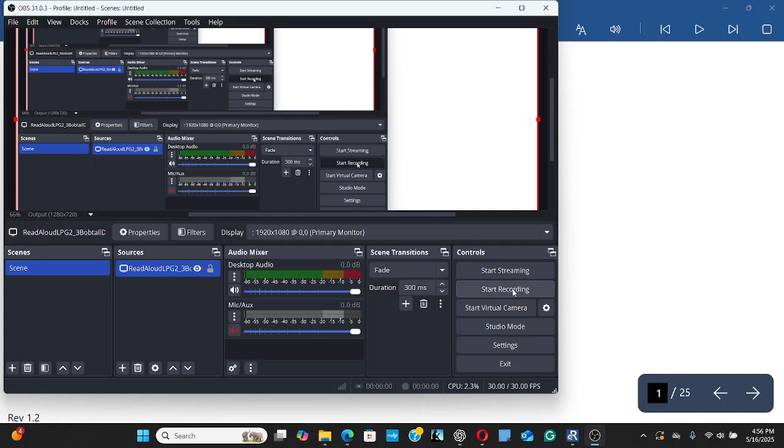Texas LP Gas Examination Study Guide, Bobtail Driver, Employee Level. Railroad Commission of Texas, Rev 1.2. Railroad Commission of Texas, Texas LP Gas Examination Study Guide, 1.

Notice: this publication is intended for use in its entirety as a guide for persons preparing to take a Railroad Commission LP gas qualifying examination. Any other use or distribution of this publication or use or distribution of any portion of this publication for any purpose whatsoever is considered by the Railroad Commission of Texas to be misuse of this publication.

This publication is not intended to be an exhaustive treatment of the subjects covered and should not be interpreted as precluding the use of other safety programs or procedures that comply with 1. applicable federal, state, and/or local code provisions, statutes, ordinances, and/or other regulations, including, but not limited to, the Railroad Commission of Texas LP gas safety rules and codes adopted by the Railroad Commission of Texas, and/or 2. other industry standards and/or practices.

Every effort was made to ensure that this publication was accurate and up to date as of the date of publication. The reader is cautioned, however, about reliance on this publication or any portion thereof at any time thereafter, particularly because changes in technology are likely to occur that might make portions of this publication inaccurate and out of date.

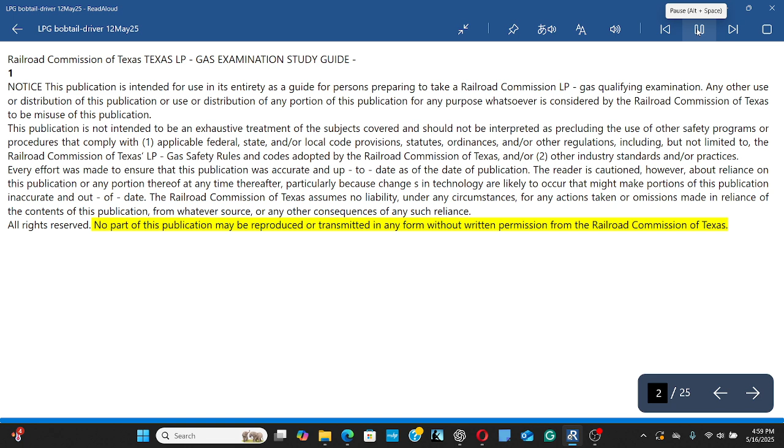Railroad Commission of Texas, Texas LP Gas Examination Study Guide, 2. LP Gas Examination Study Guide, Employee Level, Bobtail Driver. Who should use this guide? You should use this guide if you plan to take the Railroad Commission's employee level qualifying examination to operate a propane bobtail. The guide may not be used during the examination.

The bobtail certification qualifies you to perform the following LP gas activities: operate a bobtail, operate a transport unit, perform leak checks and pressure tests, light appliances, adjust regulators and thermocouples, inspect, requalify, fill, disconnect, and connect DOT cylinders, including forklift cylinders, replace cylinder valves, and fill ASME motor fuel tanks or mobile fuel containers.

The bobtail certification does not qualify you to connect or disconnect containers, except when performing a pressure test or removing a container from service. To requalify cylinders, your employer must have a requalifier's identification number, RIN, issued by the U.S. Department of Transportation's Pipeline and Hazardous Materials Safety Administration.

What books do I need? This examination tests your knowledge of the laws and standards that apply to bobtail operations in Texas. These laws and standards are found in 4 books: LP Gas Safety Rules, Texas Railroad Commission; NFPA 58 Liquefied Petroleum Gas Code, National Fire Protection Association, 2017; NFPA 54 National Fuel Gas Code, National Fire Protection Association, 2018; Title 49, Code of Federal Regulations, CFR, Supplement.

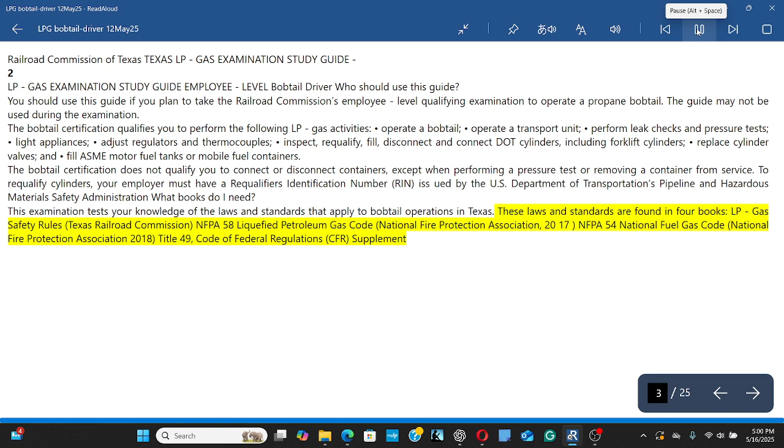Railroad Commission of Texas, Texas LP Gas Examination Study Guide, 3. Where do I get these books? You may download the current edition of the Railroad Commission's LP Gas Safety Rules in PDF format free online at www.rrc.texas.gov. If you need printed copies, they may be purchased for $10, tax included, by calling the Railroad Commission's Publications Office at 512-463-7309.

You may also order NFPA manuals online at www.nfpa.org, click on Codes and Standards. The full current text of 49 CFR can also be viewed online. Go to http://ecfr.gov and select Title 49 Transportation.

Sections and topics. Before you take this examination, you should know the definitions found in this study guide and the contents of the sections of the codes and standards listed below. The actual examination questions may not cover all of the listed sections and topics.

Terms and definitions. Note, the list below is not exhaustive. You are responsible for knowing all the terms and definitions that apply to the LP gas activities you will perform, as well as the rules and standards highlighted in this guide. Note, informal terms that are sometimes used in the propane industry instead of formal technical terms are given in brackets.

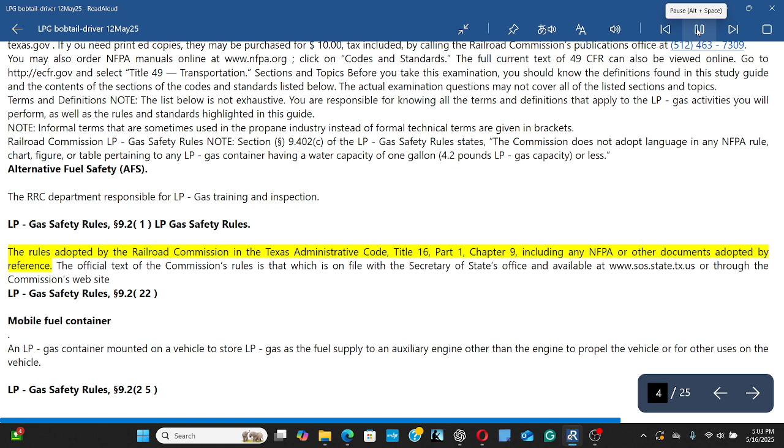The RRC Department is responsible for LP gas training and inspection. LP Gas Safety Rules, 9.2: LP Gas Safety Rules are the rules adopted by the Railroad Commission in the Texas Administrative Code, Title 16, Part 1, Chapter 9, including any NFPA or other documents adopted by reference. The official text of the Commission's rules is that which is on file with the Secretary of State's office and available at www.sos.state.tx.us or through the Commission's website.

LP Gas Safety Rules, 9.2.22. Mobile Fuel Container: An LP gas container mounted on a vehicle to store LP gas as the fuel supply to an auxiliary engine other than the engine to propel the vehicle, or for other uses on the vehicle.

LP Gas Safety Rules, 9.2.25. Railroad Commission of Texas, Texas LP Gas Examination Study Guide, item 4: Motor Fuel Container. An LP gas container mounted on a vehicle to store LP gas as the fuel supply to an engine used to propel the vehicle.

LP Gas Safety Rules, 9.2.27. Rules Examination: The Commission's written examination that measures an examinee's working knowledge of Chapter 113 of the Texas Natural Resources Code and/or the current LP Gas Safety Rules. LP Gas Safety Rules, 9.2.41.

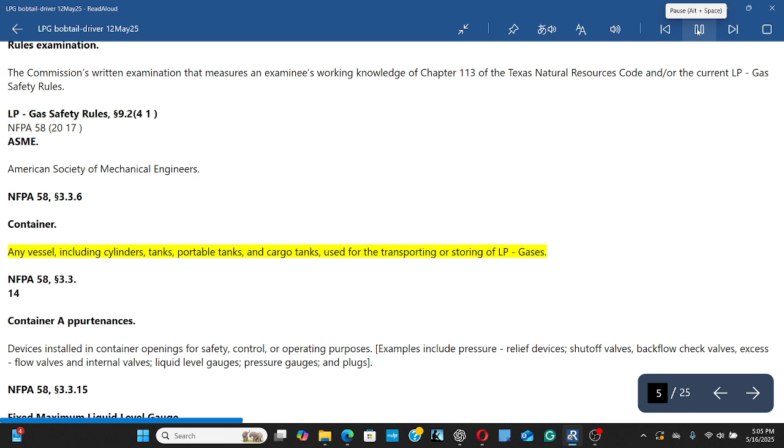NFPA 58, 2017. ASME: American Society of Mechanical Engineers. NFPA 58, 3.3.6. Container: Any vessel, including cylinders, tanks, portable tanks, and cargo tanks, used for the transporting or storing of LP gases. NFPA 58, 3.3.14.

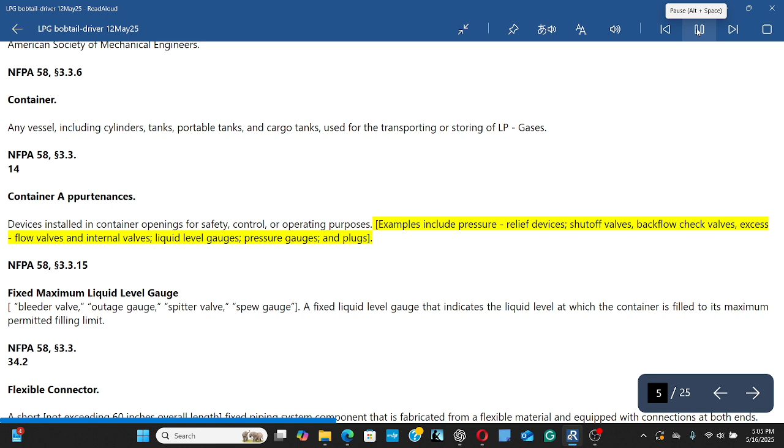Container appurtenances: Devices installed in container openings for safety, control, or operating purposes. Examples include pressure relief devices, shut-off valves, backflow check valves, excess flow valves and internal valves, liquid level gauges, pressure gauges, and plugs. NFPA 58.

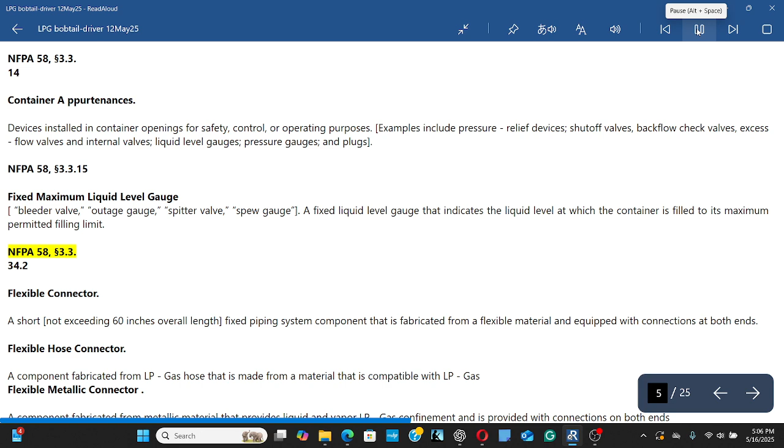3.3.15. Fixed maximum liquid level gauge, also called bleeder valve, outage gauge, spitter valve, or spew gauge: A fixed liquid level gauge that indicates the liquid level at which the container is filled to its maximum permitted filling limit. NFPA 58, 3.3.

34.2. Flexible connector: A short, not exceeding 60 inches overall length, fixed piping system component that is fabricated from a flexible material and equipped with connections at both ends.

Flexible hose connector: A component fabricated from LP gas hose that is made from a material compatible with LP gas. Flexible metallic connector: A component fabricated from metallic material that provides liquid and vapor LP gas confinement and is provided with connections on both ends. Maximum allowable working pressure (MAWP): The maximum pressure at which a pressure vessel is to operate, as described by the ASME Boiler and Pressure Vessel Code. NFPA 58, 3.3.47.

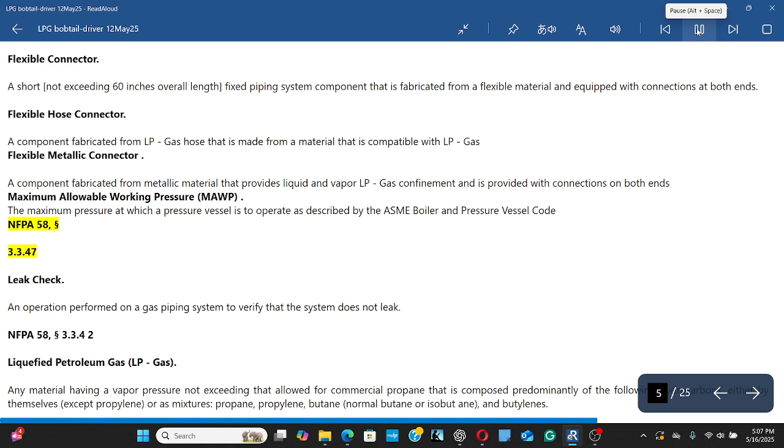Leak check: An operation performed on a gas piping system to verify that the system does not leak. NFPA 58.

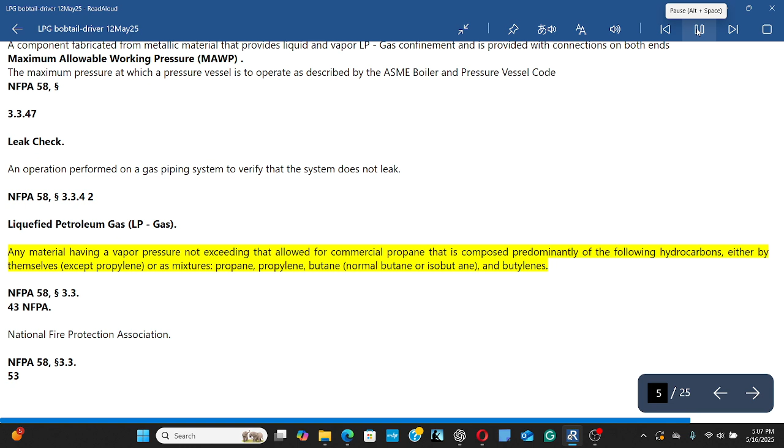3.3.42. Liquefied petroleum gas (LP gas): Any material having a vapor pressure not exceeding that allowed for commercial propane, composed predominantly of the following hydrocarbons, either by themselves except propylene, or as mixtures: propane, propylene, butane, normal butane or isobutane, and butylenes. NFPA 58, 3.3.43.

NFPA: National Fire Protection Association. NFPA 58, 3.3.53. Railroad Commission of Texas, Texas LP Gas Examination Study Guide, item 5: Overfilling Prevention Device (OPD, Stop Valve): A device designed to provide an automatic means to prevent the filling of a container beyond a predetermined level. NFPA 58, 3.3.55.

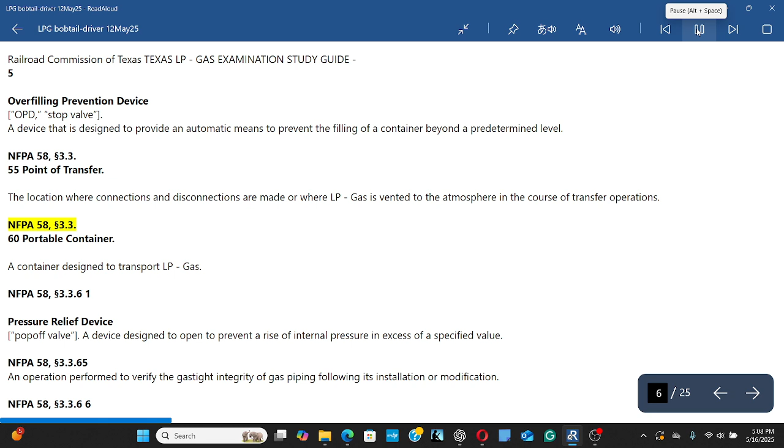Point of transfer: The location where connections and disconnections are made, or where LP gas is vented to the atmosphere in the course of transfer operations. NFPA 58, 3.3.60. Portable container: A container designed to transport LP gas. NFPA 58.

3.3.61. Pressure relief device (pop-off valve): A device designed to open to prevent a rise of internal pressure in excess of a specified value. NFPA 58.

3.3.65. An operation performed to verify the gas-tight integrity of gas piping following its installation or modification. NFPA 58.

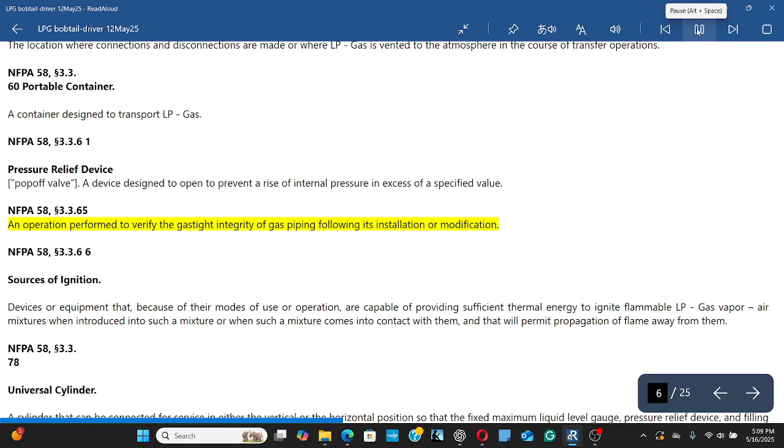3.3.66. Sources of ignition: Devices or equipment that, because of their modes of use or operation, are capable of providing sufficient thermal energy to ignite flammable LP gas vapor-air mixtures when introduced into such a mixture or when such a mixture comes into contact with them, and that will permit propagation of flame away from them.

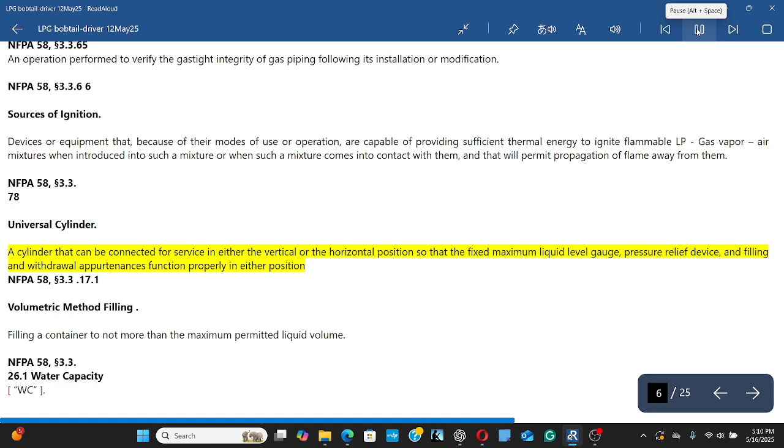NFPA 58, 3.3.78. Universal cylinder: A cylinder that can be connected for service in either the vertical or the horizontal position, so that the fixed maximum liquid level gauge, pressure relief device, and filling and withdrawal appurtenances function properly in either position. NFPA 58.

3.17.1. Volumetric method filling: Filling a container to not more than the maximum permitted liquid volume. NFPA 58, 3.3.

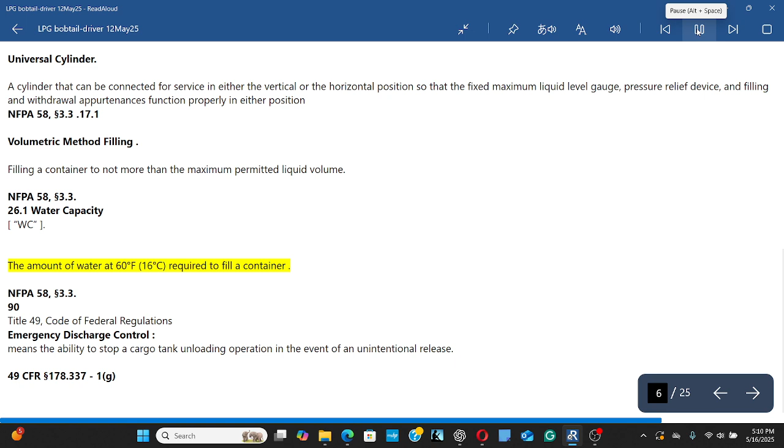Water capacity, WC. The amount of water at 60 degrees Fahrenheit, 16 degrees Celsius, required to fill a container. NFPA 58, 3.3.90. Title 49, Code of Federal Regulations.

Emergency discharge control means the ability to stop a cargo tank unloading operation in the event of an unintentional release. 49 CFR 178.337, 1, G.

Railroad Commission of Texas, Texas LP Gas Examination Study Guide. 6. Key topics. Note, the list below is not exhaustive. You are responsible for knowing all the facts, rules, standards, and procedures that apply to the LP gas activities you will perform, as well as the rules and standards highlighted in this guide. As you study the applicable codes and standards, pay special attention to the facts, rules, and procedures related to the following key topics. When you take the examination, read each question very carefully.

Administrative rules, general requirements. Company license. No person may engage in any LP gas activity until that person has obtained a license from the Commission authorizing the LP gas activities. LP Gas Safety Rules, 9.7, A.

Licensees, registered manufacturers, company representatives, and operations supervisors at each outlet shall have copies of all current licenses and/or manufacturer registrations and certificates for employees at that location available for inspection during regular business hours. LP Gas Safety Rules, 9.7, C.

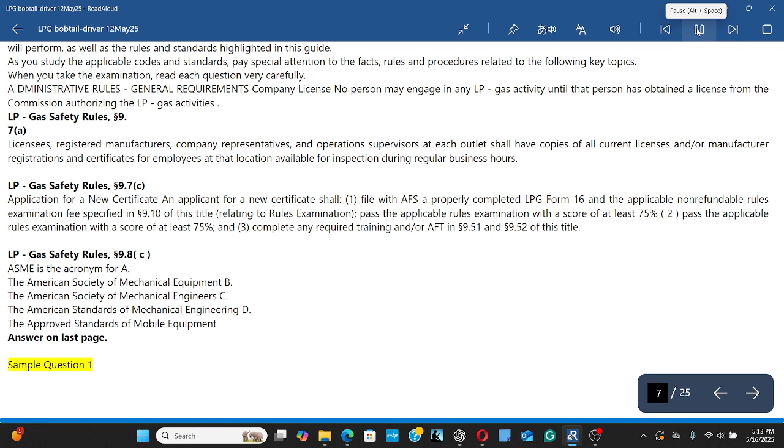Railroad Commission of Texas, Texas LP Gas Examination Study Guide. 7. Certificate Renewal. Certificate holders shall remit the non-refundable $35 annual certificate renewal fee to AFS on or before May 31st of each year. Individuals who hold more than one certificate shall pay only one annual renewal fee.

1. Failure to pay the non-refundable annual renewal fee by the deadline shall result in a lapsed certificate. A. To renew a lapsed certification, the individual must pay the non-refundable $35 annual renewal fee plus a non-refundable $20 late filing fee. B. If an individual's certificate lapses or expires, that individual shall immediately cease performance of any LP gas activities authorized by the certificate.

C. If an individual's certificate has been expired for more than 2 years from May 31st of the year in which the certificate lapsed, that individual shall comply with the requirements in 9.8 of this title, relating to requirements and application for a new certificate, or 9.13 of this title. LP Gas Safety Rules, 9.9, C.

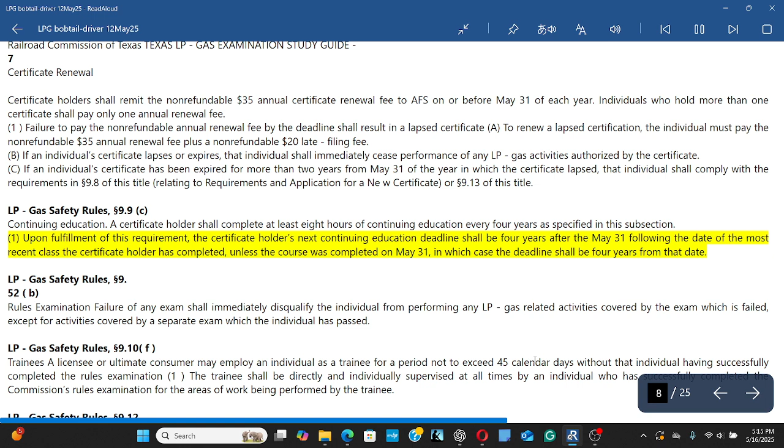Continuing Education. A certificate holder shall complete at least 8 hours of continuing education every 4 years as specified in this subsection. 1. Upon fulfillment of this requirement, the certificate holder's next continuing education deadline shall be 4 years after the May 31st following the date of the most recent class the certificate holder has completed, unless the course was completed on May 31st, in which case the deadline shall be 4 years from that date.

LP Gas Safety Rules, 9.52, B. Rules examination. Failure of any exam shall immediately disqualify the individual from performing any LP gas-related activities covered by the exam which is failed, except for activities covered by a separate exam which the individual has passed. LP Gas Safety Rules, 9.10, F.

Trainees. A licensee or ultimate consumer may employ an individual as a trainee for a period not to exceed 45 calendar days without that individual having successfully completed the rules examination. 1. The trainee shall be directly and individually supervised at all times by an individual who has successfully completed the Commission's rules examination for the areas of work being performed by the trainee. LP Gas Safety Rules, 9.12.

Railroad Commission of Texas, Texas LP Gas Examination Study Guide. 8. Qualified personnel. Persons whose duties fall within the scope of this code shall be provided with training that is consistent with the scope of their job activities and that includes proper handling and emergency response procedures. NFPA 58, 4.4.1. Refresher training shall be provided at least every 3 years. NFPA 58, 4.4.3.

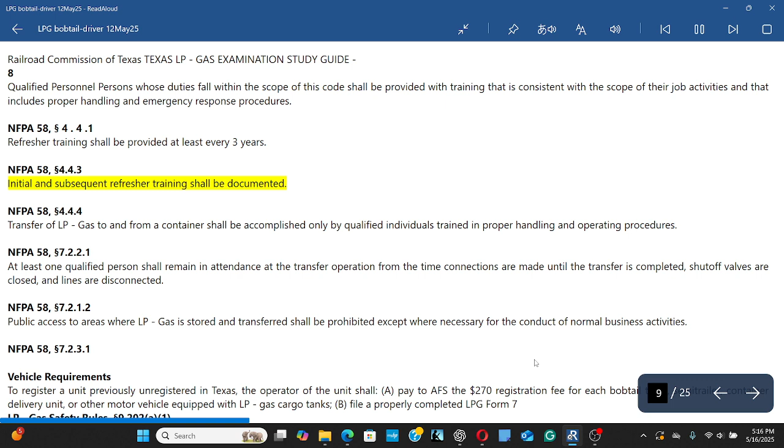Initial and subsequent refresher training shall be documented. NFPA 58, 4.4.4: Transfer of LP gas to and from a container shall be accomplished only by qualified individuals trained in proper handling and operating procedures.

NFPA 58, 7.2.2.1: At least one qualified person shall remain in attendance at the transfer operation from the time connections are made until the transfer is completed, shut-off valves are closed, and lines are disconnected.

NFPA 58, 7.2.1.2: Public access to areas where LP gas is stored and transferred shall be prohibited except where necessary for the conduct of normal business activities.

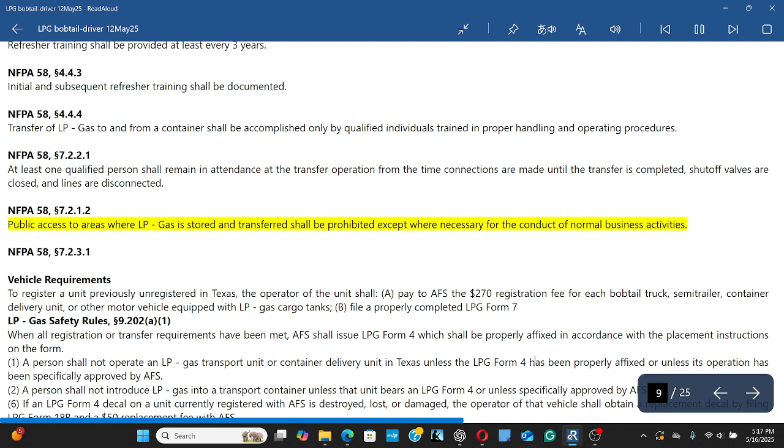NFPA 58, 7.2.3.1: Vehicle requirements. To register a unit previously unregistered in Texas, the operator of the unit shall: A, pay to AFS the $270 registration fee for each bobtail truck, semi-trailer, container delivery unit, or other motor vehicle equipped with LP gas cargo tanks. B, file a properly completed LPG Form 7.

LP Gas Safety Rules, 9.202, A.1: When all registration or transfer requirements have been met, AFS shall issue LPG Form 4 which shall be properly affixed in accordance with the placement instructions on the form.

1. A person shall not operate an LP gas transport unit or container delivery unit in Texas unless the LPG Form 4 has been properly affixed or unless its operation has been specifically approved by AFS. 2. A person shall not introduce LP gas into a transport container unless that unit bears an LPG Form 4 or unless specifically approved by AFS.

6. If an LPG Form 4 decal on a unit currently registered with AFS is destroyed, lost, or damaged, the operator of that vehicle shall obtain a replacement decal by filing LPG Form 18B and a $50 replacement fee with AFS. LP Gas Safety Rules, 9.202, C.

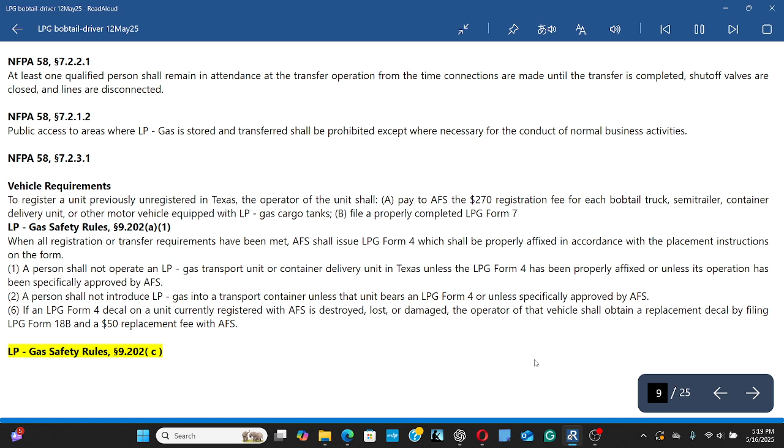Railroad Commission of Texas, Texas LP Gas Examination Study Guide. 9. Regulations for operating a bobtail. Driver Vehicle Inspection: A motor vehicle shall not be operated in such a condition as to likely cause an accident or a breakdown of the vehicle.

49 CFR 396.7, A: Report required. Every motor carrier shall require its drivers to report, and every driver shall prepare a report in writing at the completion of each day's work on each vehicle operated. The report shall cover at least the following parts and accessories.

1. Service brakes including trailer brake connections. 2. Parking brake. 3. Steering mechanism. 4. Lighting devices and reflectors. 5. Tires. 6. Horn. 7. Windshield wipers. 8. Rear vision mirrors. 9. Coupling devices. 10. Wheels and rims. 11. Emergency equipment.

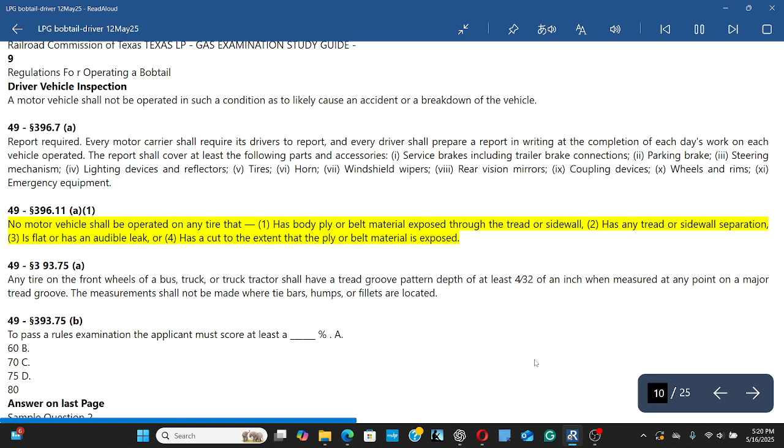49 CFR 396.11, A.1: No motor vehicle shall be operated on any tire that: 1, has body ply or belt material exposed through the tread or sidewall; 2, has any tread or sidewall separation; 3, is flat or has an audible leak; or 4, has a cut to the extent that the ply or belt material is exposed.

49 CFR 393.75, A: Any tire on the front wheels of a bus, truck, or truck tractor shall have a tread groove pattern depth of at least 4/32 of an inch when measured at any point on a major tread groove. The measurements shall not be made where tie bars, humps, or fillets are located.

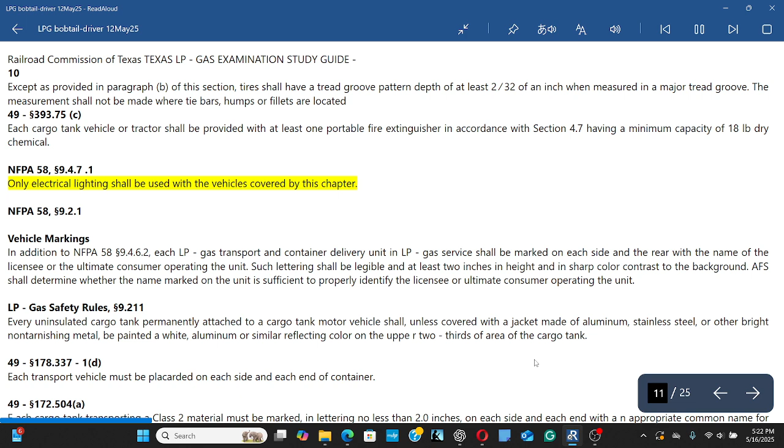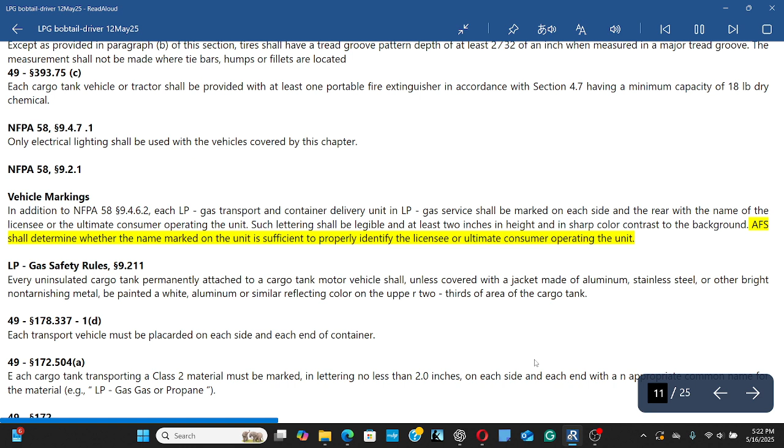NFPA 58, 9.2.1: Vehicle markings. In addition to NFPA 58 9.4.6.2, each LP gas transport and container delivery unit in LP gas service shall be marked on each side and the rear with the name of the licensee or the ultimate consumer operating the unit. Such lettering shall be legible and at least 2 inches in height and in sharp color contrast to the background. AFS shall determine whether the name marked on the unit is sufficient to properly identify the licensee or ultimate consumer operating the unit. LP Gas Safety Rules, 9.211.

Every uninsulated cargo tank permanently attached to a cargo tank motor vehicle shall, unless covered with a jacket made of aluminum, stainless steel, or other bright non-tarnishing metal, be painted white, aluminum, or a similar reflecting color on the upper 2/3 of the area of the cargo tank.

49 CFR 178.337, 1, d: Each transport vehicle must be placarded on each side and each end of container.

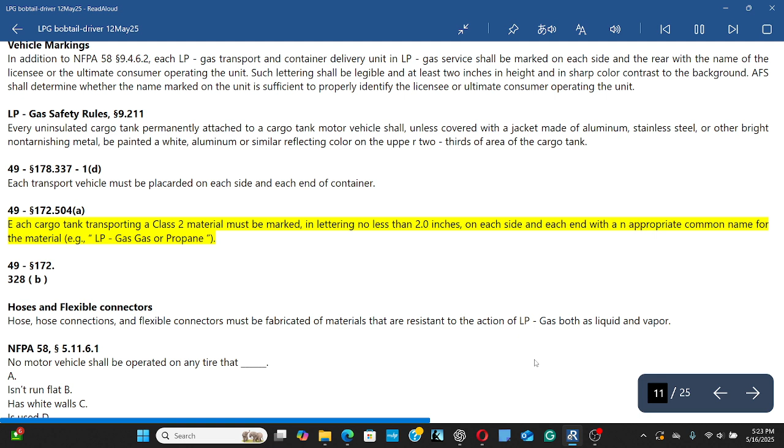Each cargo tank transporting a Class 2 material must be marked, in lettering no less than 2.0 inches, on each side and each end with an appropriate common name for the material, for example LP gas or propane. 49 CFR 172.328.

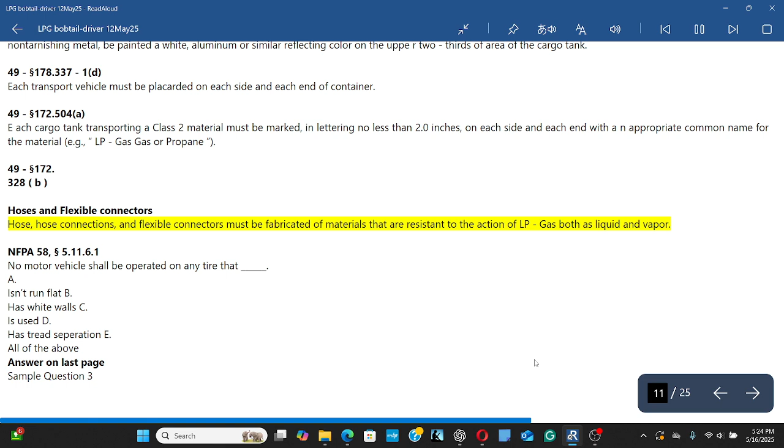B. Hoses and flexible connectors. Hose connections and flexible connectors must be fabricated of materials that are resistant to the action of LP gas, both as liquid and vapor. NFPA 58, 5.11.6.1.

No motor vehicle shall be operated on any tire that: a. Isn't run flat, b. Has white walls, c. Is used, d. Has tread separation, e. All of the above. Answer on last page. Sample question 3.

Railroad Commission of Texas LP Gas Examination Study Guide. 11. Flexible connectors used in the piping system to compensate for stresses and vibration shall be limited to 3 feet in overall length and, when replaced, shall comply with 5.11.6. NFPA 58.

NFPA 58, 9.4.3.6. Flexible hose connectors shall be permanently marked to indicate the date of installation of the flexible hose connector. NFPA 58, 9.4.3.7.1. The flexible hose portion of the connector shall be replaced within 10 years of the installation of the connector and visually inspected before the first delivery of each day. NFPA 58, 9.4.3.7.2. By July 1, 2000, the operator must assure that each delivery hose assembly is permanently marked with a unique identification number and maximum working pressure.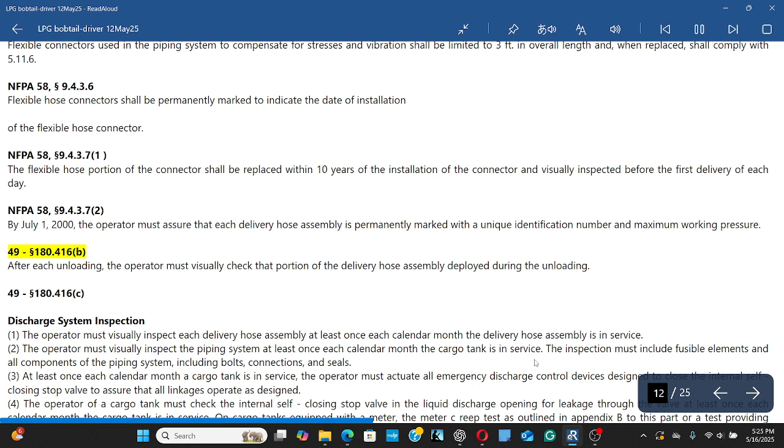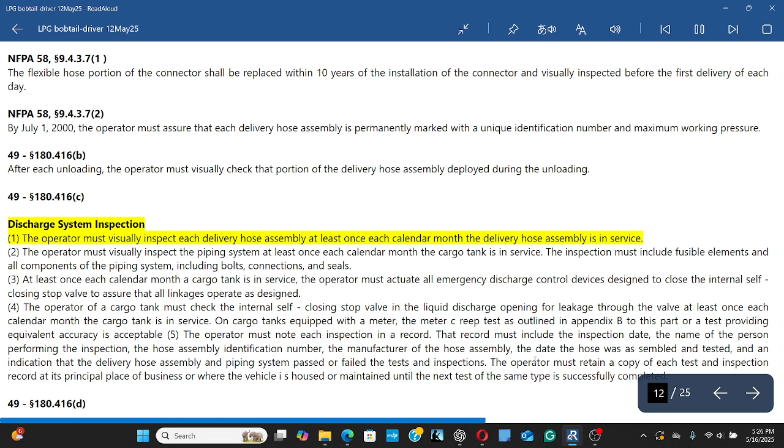49 CFR 180.416, b. After each unloading, the operator must visually check that portion of the delivery hose assembly deployed during the unloading. 49 CFR 180.416, c. Discharge system inspection. 1. The operator must visually inspect each delivery hose assembly at least once each calendar month the delivery hose assembly is in service. 2. The operator must visually inspect the piping system at least once each calendar month the cargo tank is in service.

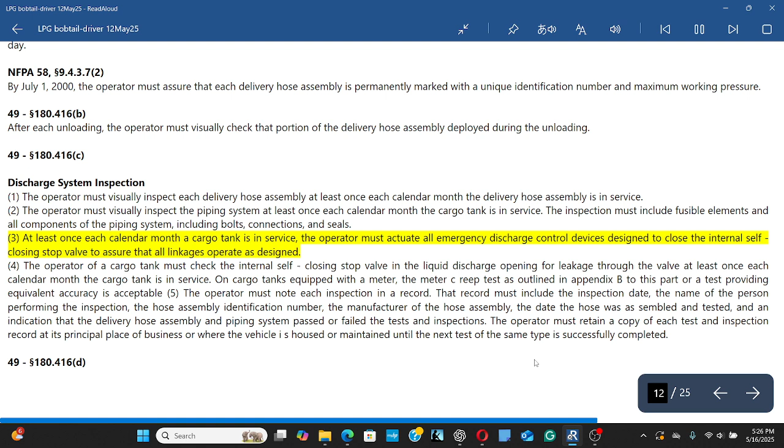The inspection must include fusible elements and all components of the piping system, including bolts, connections, and seals. 3. At least once each calendar month the cargo tank is in service, the operator must actuate all emergency discharge control devices designed to close the internal self-closing stop valve to assure that all linkages operate as designed. 4. The operator of a cargo tank must check the internal self-closing stop valve in the liquid discharge opening for leakage through the valve at least once each calendar month the cargo tank is in service.

On cargo tanks equipped with a meter, the meter creep test as outlined in Appendix B to this part, or a test providing equivalent accuracy, is acceptable. 5. The operator must note each inspection in a record. That record must include the inspection date, the name of the person performing the inspection, the hose assembly identification number, the manufacturer of the hose assembly, the date the hose was assembled and tested, and an indication that the delivery hose assembly and piping system passed or failed the tests and inspections. The operator must retain a copy of each test and inspection record at its principal place of business or where the vehicle is housed or maintained until the next test of the same type is successfully completed.

49 CFR 180.416, D. Railroad Commission of Texas LP Gas Examination Study Guide.

12. No operator may use a delivery hose assembly determined to have any condition identified below for unloading liquefied compressed gases. An operator may remove and replace damaged sections or correct defects discovered. Repaired hose assemblies may be placed back in service if retested successfully in accordance with paragraph F of this section: 1. Damage to the hose cover that exposes the reinforcement. 2. Wire braid reinforcement that has been kinked or flattened so as to permanently deform the wire braid. 3. Soft spots when not under pressure, bulging under pressure, or loose outer covering. 4. Damaged, slipping, or excessively worn hose couplings. 5. Loose or missing bolts or fastenings on bolted hose coupling assemblies.

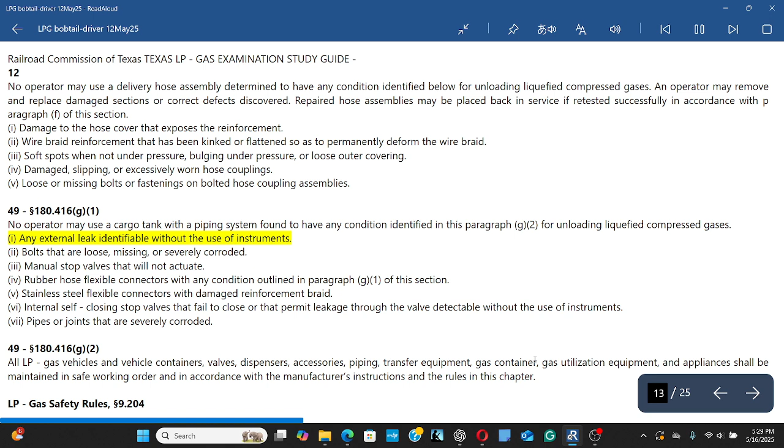49 CFR 180.416, G. 1. No operator may use a cargo tank with a piping system found to have any condition identified in this paragraph G.2 for unloading liquefied compressed gases: 1. Any external leak identifiable without the use of instruments. 2. Bolts that are loose, missing, or severely corroded. 3. Manual stop valves that will not actuate.

4. Rubber hose flexible connectors with any condition outlined in paragraph G.1 of this section. 5. Stainless steel flexible connectors with damaged reinforcement braid.

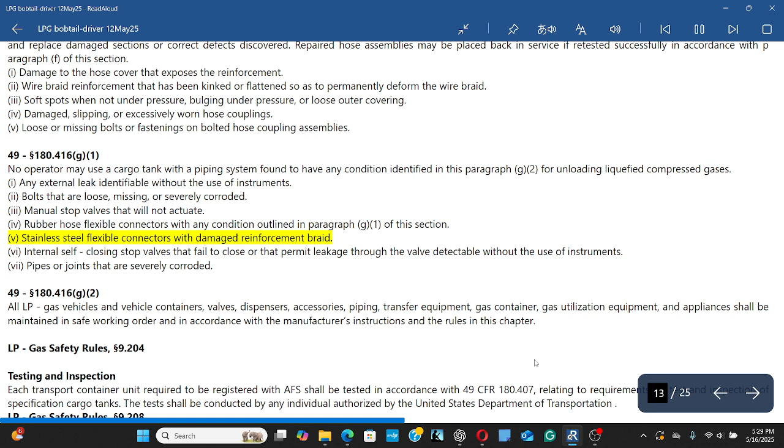6. Internal self-closing stop valves that fail to close or that permit leakage through the valve detectable without the use of instruments. 7. Pipes or joints that are severely corroded. 49 CFR

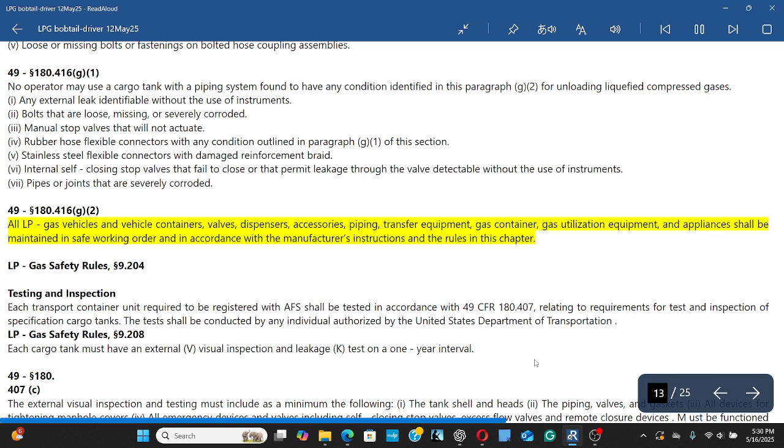180.416(g)(2). All LP-gas vehicles and vehicle containers, valves, dispensers, accessories, piping, transfer equipment, gas containers, gas utilization equipment, and appliances shall be maintained in safe working order and in accordance with the manufacturer's instructions and the rules in this chapter. LP-Gas Safety Rules, 9.204.

Testing and Inspection. Each transport container unit required to be registered with AFS shall be tested in accordance with 49 CFR 180.407, relating to requirements for test and inspection of specification cargo tanks. The tests shall be conducted by any individual authorized by the United States Department of Transportation. LP-Gas Safety Rules, 9.208.

Each cargo tank must have an external visual (V) inspection and leakage (K) test on a 1-year interval. 49 CFR 180.407(c). The external visual inspection and testing must include as a minimum the following: 1, the tank shell and heads; 2, the piping, valves, and gaskets; 3, all devices for tightening manhole covers; 4, all emergency devices and valves including self-closing stop valves, excess flow valves and remote closure devices. Must be functioned to demonstrate proper operation.

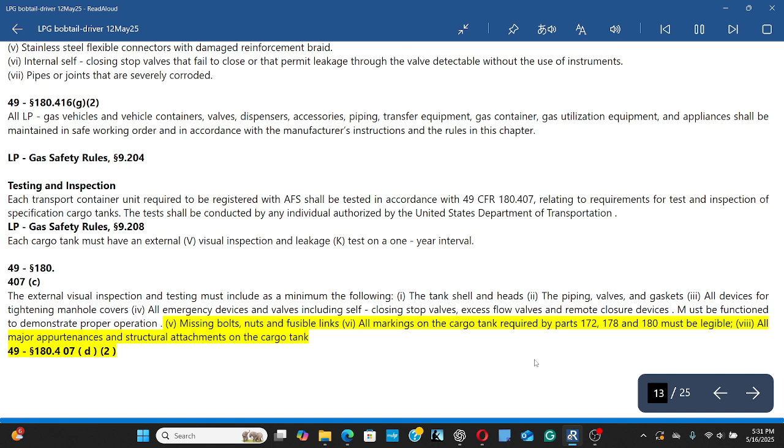5, missing bolts, nuts and fusible links. 6. All markings on the cargo tank required by parts 172, 178 and 180 must be legible. 8. All major appurtenances and structural attachments on the cargo tank. 49 CFR 180.407(d)(2). Railroad Commission of Texas, Texas LP-Gas Examination Study Guide.

13. Each cargo tank successfully completing the test and inspection requirements contained in 180.407 must be marked as specified in this section. 49 CFR 180.415(a). Each cargo tank must be durably and legibly marked, in English, with the date, month and year, and the type of test or inspection performed, subject to the following provisions. 1. The date must be readily identifiable with the applicable test or inspection. 2. The markings must be in letters and numbers at least 1.25 inches high, near the specification plate or anywhere on the front head. 49 CFR

180.415(b). The type of test or inspection may be abbreviated as follows: 1, V for external visual inspection and test; 2, I for internal visual inspection; 3, P for pressure test; 4, L for lining inspection; 5, T for thickness test; and 6, K for leakage test. 49 CFR 180.415(b). 3, Discharge system control.

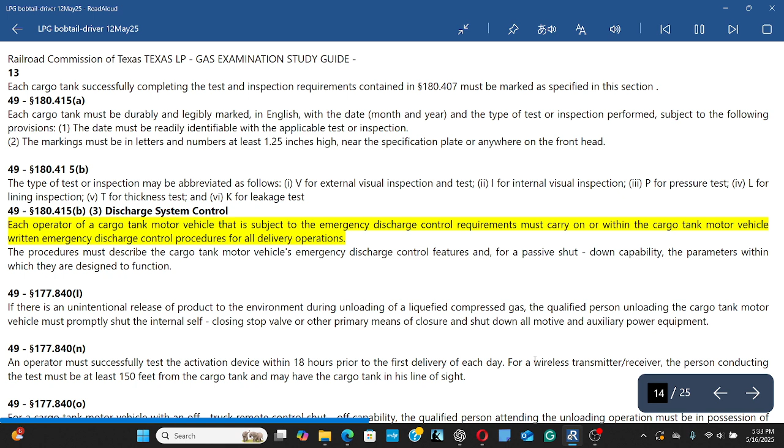Each operator of a cargo tank motor vehicle that is subject to the emergency discharge control requirements must carry on or within the cargo tank motor vehicle written emergency discharge control procedures for all delivery operations. The procedures must describe the cargo tank motor vehicle's emergency discharge control features and, for a passive shutdown capability, the parameters within which they are designed to function. 49 CFR

177.840(l). If there is an unintentional release of product to the environment during unloading of a liquefied compressed gas, the qualified person unloading the cargo tank motor vehicle must promptly shut the internal self-closing stop valve or other primary means of closure and shut down all motive and auxiliary power equipment. 49 CFR

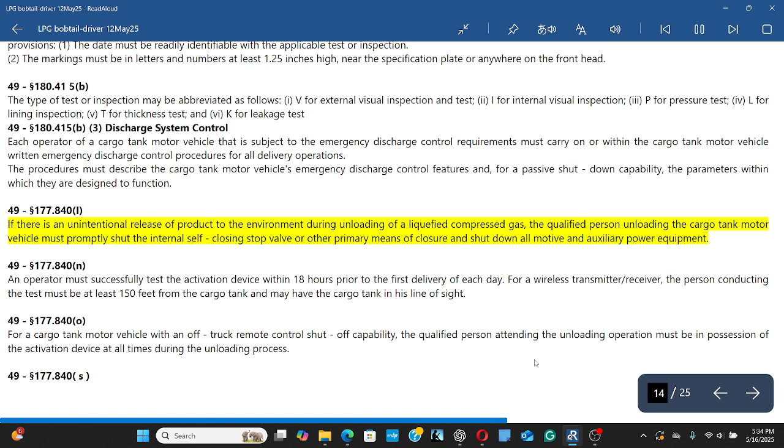177.840(n). An operator must successfully test the activation device within 18 hours prior to the first delivery of each day. For a wireless transmitter/receiver, the person conducting the test must be at least 150 feet from the cargo tank and may have the cargo tank in his line of sight. 49 CFR

177.840(o). For a cargo tank motor vehicle with an off-truck remote control shut-off capability, the qualified person attending the unloading operation must be in possession of the activation device at all times during the unloading process. 49 CFR 177.840(s). Railroad Commission of Texas, Texas LP-Gas Examination Study Guide.

14. A cargo tank motor vehicle must have an off-truck remote means to close the internal self-closing stop valve and shut off all motive and auxiliary power equipment upon activation by a qualified person attending the unloading of the cargo tank motor vehicle. Off-truck remote shut-off. It must function reliably at a distance of 150 feet. 49 CFR 173.315(n)(3). Shipping papers.

A driver of a motor vehicle containing hazardous material, and each carrier using such a vehicle, shall ensure that the shipping paper required by the section is readily available to, and recognizable by, authorities in the event of accident or inspection. Specifically, the driver and the carrier shall, 1. Clearly distinguish the shipping paper, if it is carried with other shipping papers or other papers of any kind, by either distinctively tabbing it or by having it appear first, and, 2.

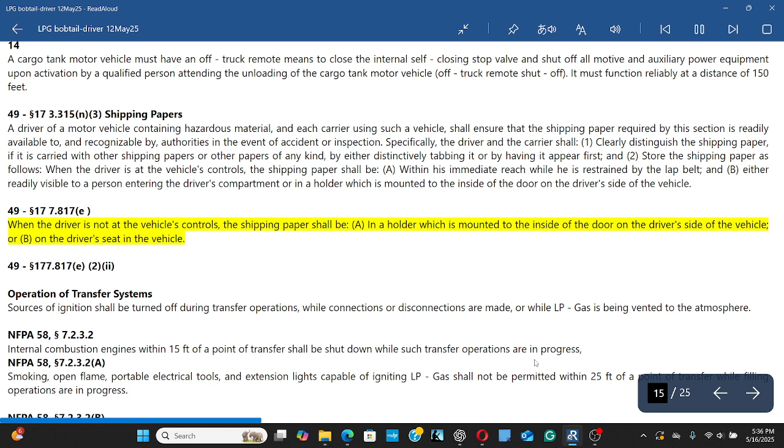177.817, e. When the driver is not at the vehicle's controls, the shipping paper shall be, a. in a holder which is mounted to the inside of the door on the driver's side of the vehicle, or, b. on the driver's seat in the vehicle. 49, 177.817, e. 2.

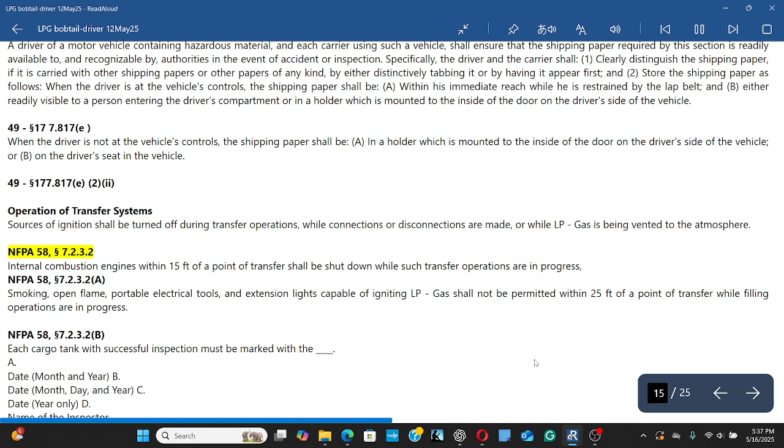Operation of transfer systems. Sources of ignition shall be turned off during transfer operations, while connections or disconnections are made, or while LP gas is being vented to the atmosphere. NFPA 58, 7.2.3.2. Internal combustion engines within 15 feet of a point of transfer shall be shut down while such transfer operations are in progress. NFPA 58,

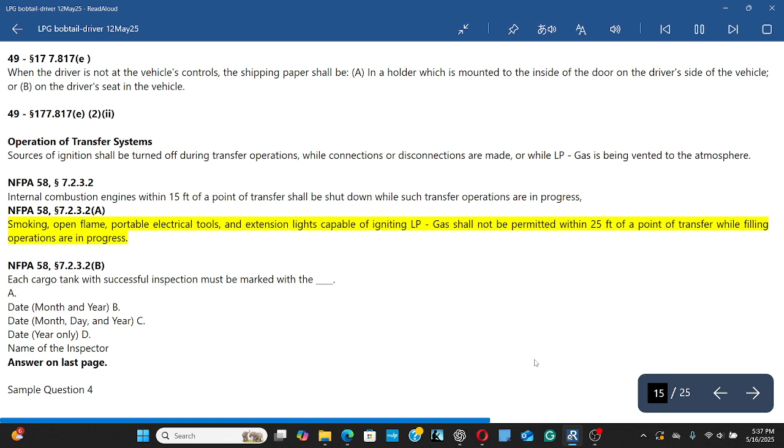7.2.3.2, a. Smoking, open flame, portable electrical tools, and extension lights capable of igniting LP gas shall not be permitted within 25 feet of a point of transfer while filling operations are in progress. NFPA 58,

7.2.3.2, b. Each cargo tank with successful inspection must be marked with the _______ a. Date, month and year, b. Date, month, day and year, c. Date, year only, d. Name of the inspector. Answer on last page. Sample question 4.

Railroad Commission of Texas Texas LP-Gas Examination Study Guide. 15. Cargo tank vehicles unloading into storage containers shall be at least 10 feet from the container and so positioned that the shutoff valves on both the truck and the container are readily accessible. NFPA 58, 7.2.3.3.

Odorization. All LP gases shall be odorized prior to being loaded into a railcar or cargo tank motor vehicle by the addition of a warning agent of such character that the gases are detectable by a distinct odor to a concentration in air of not over 1/5 the lower limit of flammability. NFPA 58, 4.2.1. The addition of the odorant shall be documented at the point of odorization.

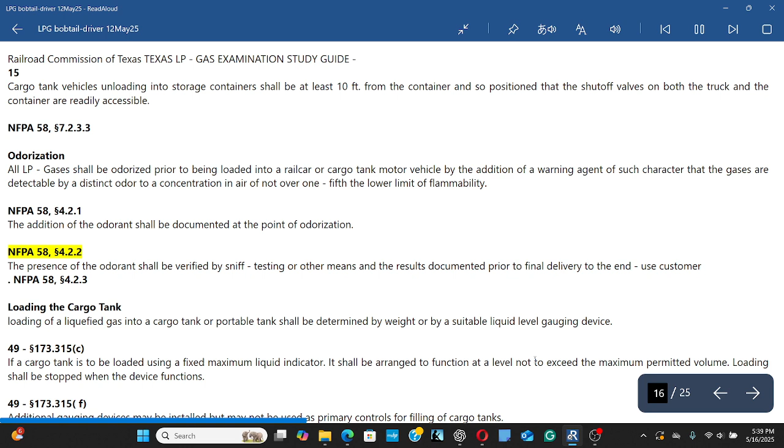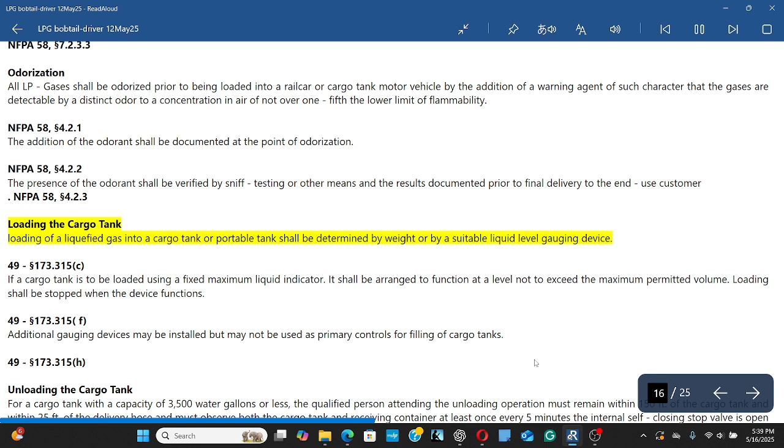NFPA 58, 4.2.2. The presence of the odorant shall be verified by sniff testing or other means and the results documented prior to final delivery to the end-use customer. NFPA 58, 4.2.3. Loading the cargo tank. Loading of a liquefied gas into a cargo tank or portable tank shall be determined by weight or by a suitable liquid level gauging device. 49,

173.315, c. If a cargo tank is to be loaded using a fixed maximum liquid indicator, it shall be arranged to function at a level not to exceed the maximum permitted volume. Loading shall be stopped when the device functions. 49, 173.315, f. Additional gauging devices may be installed but may not be used as primary controls for filling of cargo tanks. 49,

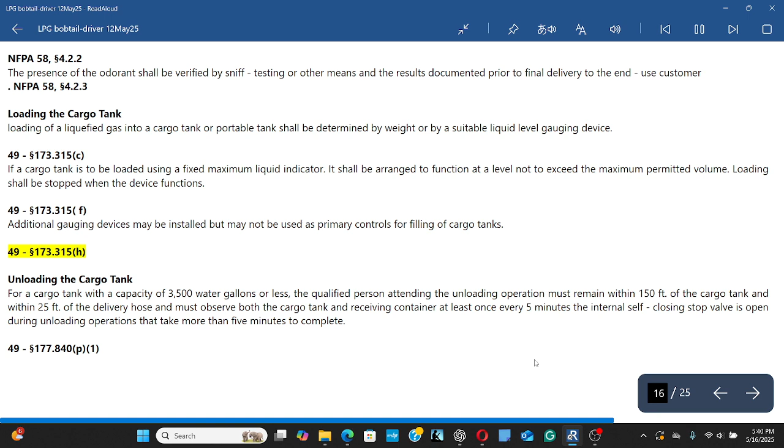173.315, h. Unloading the cargo tank. For a cargo tank with a capacity of 3,500 water gallons or less, the qualified person attending the unloading operation must remain within 150 feet of the cargo tank and within 25 feet of the delivery hose and must observe both the cargo tank and receiving container at least once every 5 minutes. The internal self-closing stop valve is opened during unloading operations that take more than 5 minutes to complete. 49, 177.840, p. 1.

Railroad Commission of Texas Texas LP-Gas Examination Study Guide. 16. Bulk Plant. All new stationary LP gas installations with individual or aggregate water capacities of 4,001 gallons or more shall, 1. Install a vertical bulkhead, 2. Install one of the following in all container openings 1 1/4 inches or greater, a.

Pneumatically operated emergency shutoff valves, ESV, b. Pneumatically operated internal valves, c. Pneumatically operated API 607 ball valves, or d. A backflow check valve may be installed where the flow is in one direction into the container. LP-Gas Safety Rules, 9.143, A. Transportation in cargo tank vehicles.

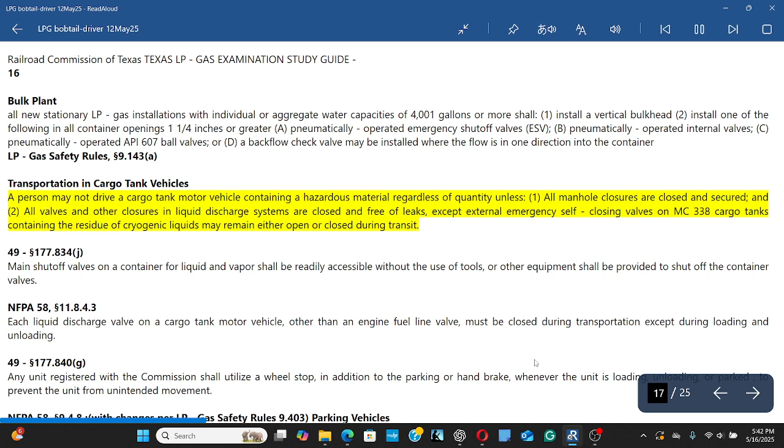A person may not drive a cargo tank motor vehicle containing a hazardous material regardless of quantity unless, 1. All manhole closures are closed and secured, and, 2. All valves and other closures in liquid discharge systems are closed and free of leaks, except external emergency self-closing valves on MC-338 cargo tanks containing the residue of cryogenic liquids may remain either open or closed during transit. 49,

177.834, J. Main shutoff valves on a container for liquid and vapor shall be readily accessible without the use of tools, or other equipment shall be provided to shut off the container valves.

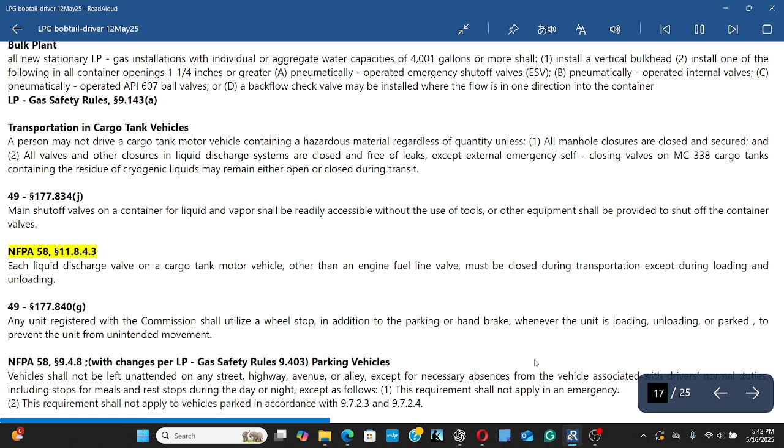NFPA 58, 11.8.4.3. Each liquid discharge valve on a cargo tank motor vehicle, other than an engine fuel line valve, must be closed during transportation except during loading and unloading. 49,

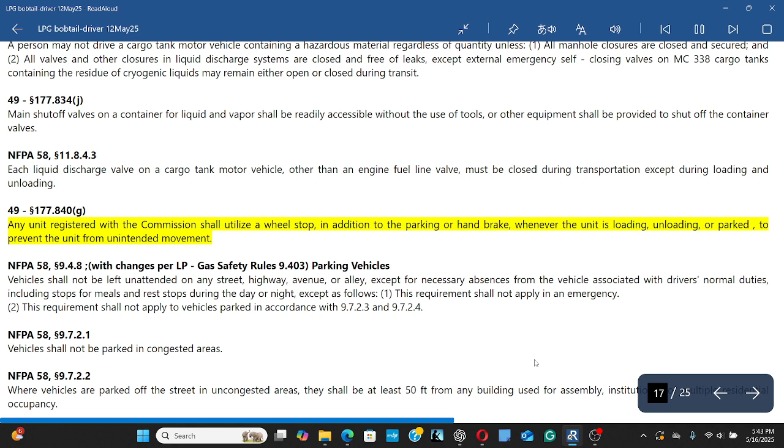177.840, G. Any unit registered with the Commission shall utilize a wheel stop, in addition to the parking or handbrake, whenever the unit is loading, unloading, or parked, to prevent the unit from unintended movement. NFPA 58, 9.4.8 with changes per LP-Gas Safety Rules 9.403, Parking Vehicles.

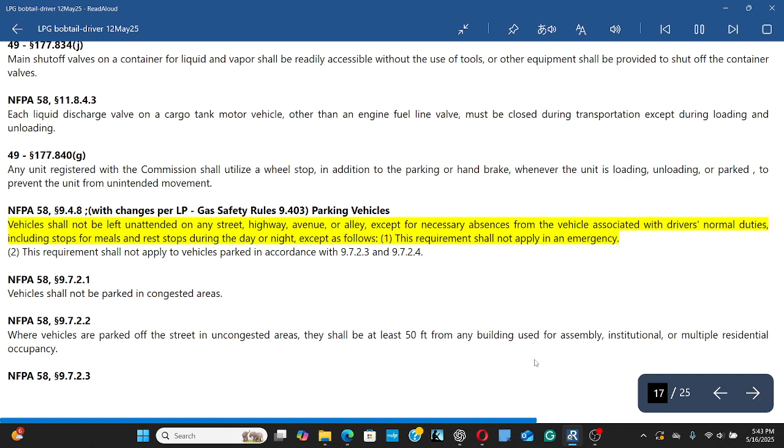Vehicles shall not be left unattended on any street, highway, avenue, or alley, except for necessary absences from the vehicle associated with driver's normal duties, including stops for meals and rest stops during the day or night, except as follows. 1. This requirement shall not apply in an emergency. 2. This requirement shall not apply to vehicles parked in accordance with 9.7.2.3 and 9.7.2.4. NFPA 58,

9.7.2.1. Vehicles shall not be parked in congested areas. NFPA 58, 9.7.2.2. Where vehicles are parked off the street in uncongested areas, they shall be at least 50 feet from any building used for assembly, institutional, or multiple residential occupancy. NFPA 58, 9.7.2.3.

Railroad Commission of Texas, Texas LP-Gas Examination Study Guide. 17. Where vehicles carrying portable containers or cargo tank vehicles of 3,500 gal water capacity or less are parked on streets adjacent to the driver's residence in uncongested residential areas, the parking locations shall be at least 50 feet from a building used for assembly, institutional, or multiple residential occupancy.

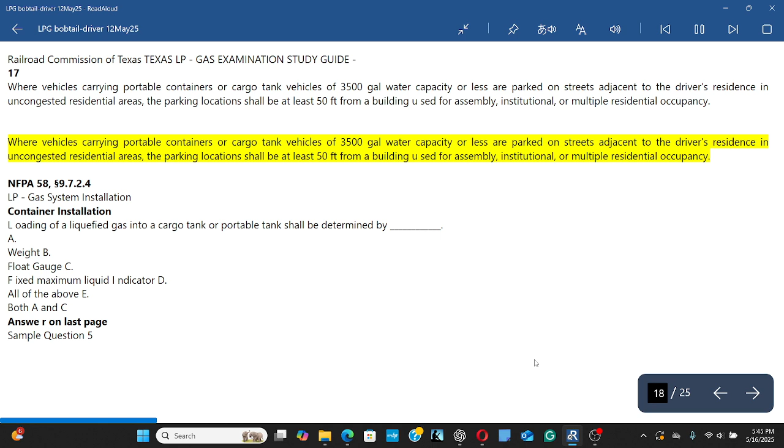Where vehicles carrying portable containers or cargo tank vehicles of 3,500 gal water capacity or less are parked on streets adjacent to the driver's residence in uncongested residential areas, the parking locations shall be at least 50 feet from a building used for assembly, institutional, or multiple residential occupancy. NFPA 58, 9.7.2.4.

LP-Gas System Installation. Container installation. Loading of a liquefied gas into a cargo tank or portable tank shall be determined by blank. A. Weight B. Float gauge C. Fixed maximum liquid level indicator D. All of the above E. Both A and C. Answer is on last page. Sample question 5.

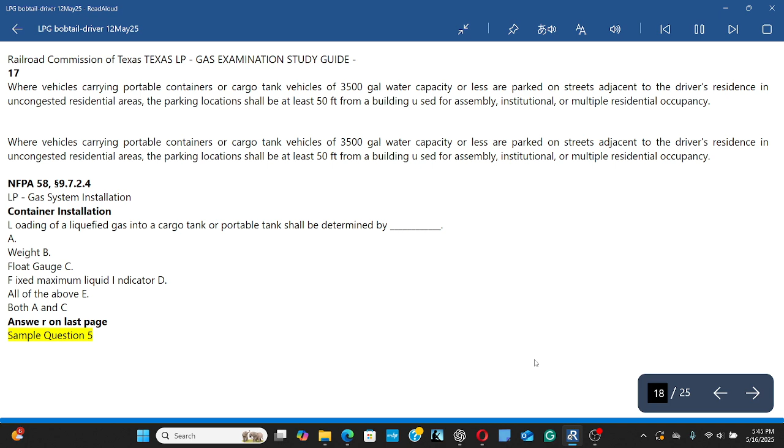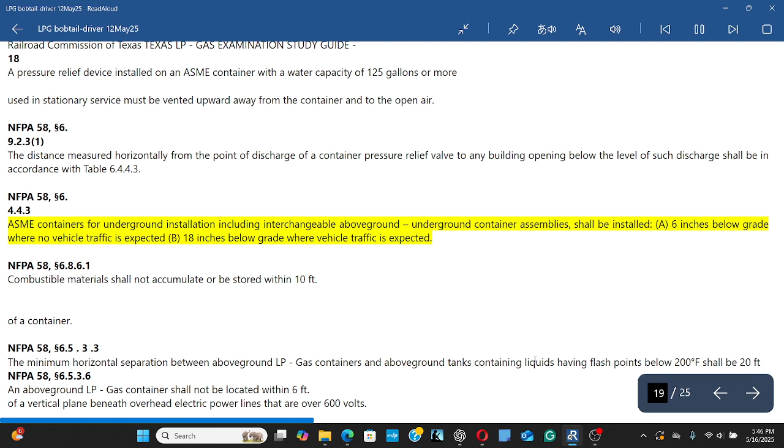6.4.4.3 ASME containers for underground installation, including interchangeable above-ground, underground container assemblies, shall be installed a. 6 inches below grade where no vehicle traffic is expected, b. 18 inches below grade where vehicle traffic is expected. NFPA 58, 6.8.6.1 Combustible materials shall not accumulate or be stored within 10 feet of a container. NFPA 58, 6.5.

3.3. The minimum horizontal separation between above-ground LP-gas containers and above-ground tanks containing liquids having flash points below 200 degrees Fahrenheit shall be 20 feet. NFPA 58, 6.5.3.6. An above-ground LP-gas container shall not be located within 6 feet of a vertical plane beneath overhead electric power lines that are over 600 volts. NFPA 58,

6.5.3.13 Container nameplate. LP-gas shall not be introduced into an ASME container unless the container is equipped with an original nameplate or at least one of the nameplates defined in this subsection permanently attached to the container. LP-Gas Safety Rules, 9.129, A.

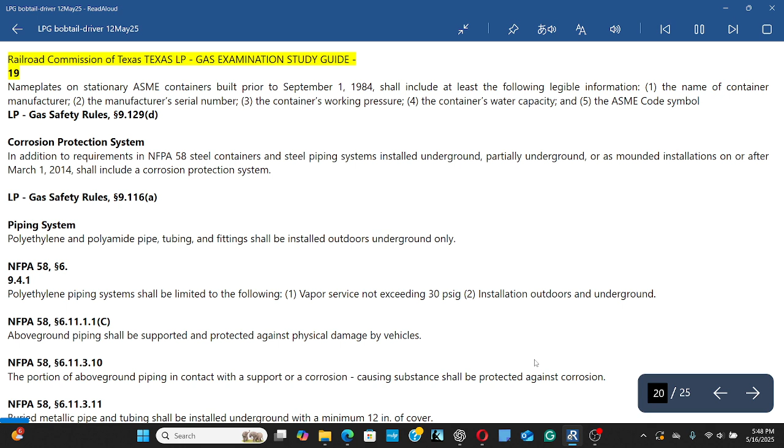Railroad Commission of Texas, Texas LP-Gas Examination Study Guide. 19. Nameplates on stationary ASME containers built prior to September 1, 1984, shall include at least the following legible information: 1. The name of container manufacturer, 2. The manufacturer's serial number, 3. The container's working pressure, 4. The container's water capacity, and 5. The ASME code symbol. LP-Gas Safety Rules, 9.129, D.

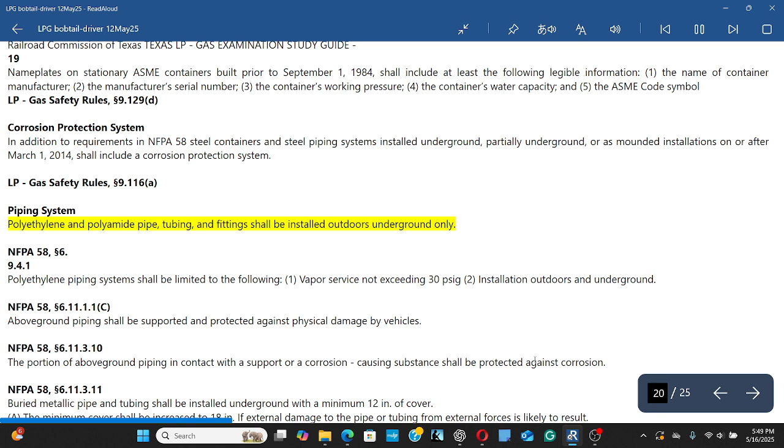Corrosion Protection System. In addition to requirements in NFPA 58, steel containers and steel piping systems installed underground, partially underground, or as mounded installations on or after March 1, 2014, shall include a corrosion protection system. LP-Gas Safety Rules, 9.116, A. Piping System. Polyethylene and polyamide pipe, tubing, and fittings shall be installed outdoors underground only. NFPA 58, 6.

9.4.1. Polyethylene piping systems shall be limited to the following: 1. Vapor service not exceeding 30 psig. 2. Installation outdoors and underground. NFPA 58, 6.11.1.1, C.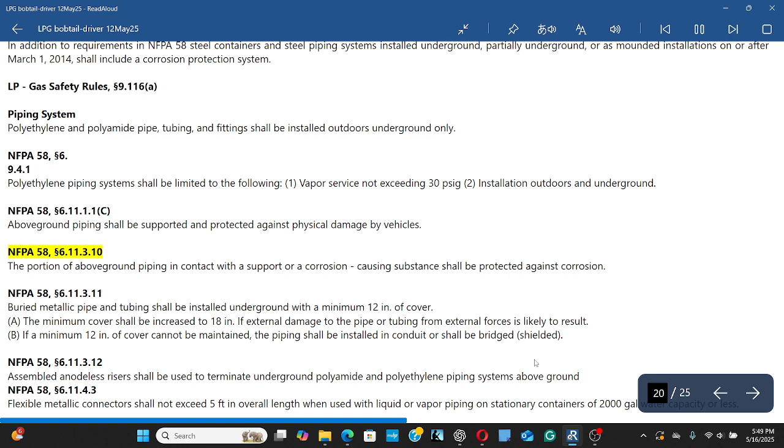Above-ground piping shall be supported and protected against physical damage by vehicles. NFPA 58, 6.11.3.10. The portion of above-ground piping in contact with a support or a corrosion-causing substance shall be protected against corrosion. NFPA 58, 6.11.3.11.

Buried metallic pipe and tubing shall be installed underground with a minimum 12 inches of cover. A. The minimum cover shall be increased to 18 inches if external damage to the pipe or tubing from external forces is likely to result. B. If a minimum 12 inches of cover cannot be maintained, the piping shall be installed in conduit or shall be bridged, shielded. NFPA 58,

6.11.3.12. Assembled anodeless risers shall be used to terminate underground polyamide and polyethylene piping systems above ground. NFPA 58, 6.11.4.3. Flexible metallic connectors shall not exceed 5 feet in overall length when used with liquid or vapor piping on stationary containers of 2,000 gal water capacity or less. NFPA 58, 6.11.6.3.

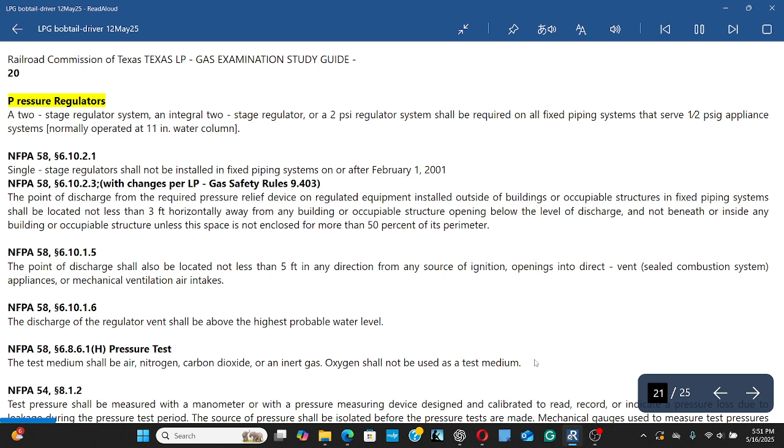Railroad Commission of Texas, Texas LP-Gas Examination Study Guide. 20. Pressure Regulators. A 2-stage regulator system, an integral 2-stage regulator, or a 2-psi regulator system shall be required on all fixed piping systems that serve 1/2 psig appliance systems normally operated at 11 inches water column. NFPA 58, 6.10.2.1. Single stage regulators shall not be installed in fixed piping systems on or after February 1, 2001. NFPA 58, 6.10.2.3 with changes per LP-Gas Safety Rules 9.403.

The point of discharge from the required pressure relief device on regulated equipment installed outside of buildings or occupiable structures in fixed piping systems shall be located not less than 3 feet horizontally away from any building or occupiable structure opening below the level of discharge, and not beneath or inside any building or occupiable structure unless the space is not enclosed for more than 50% of its perimeter. NFPA 58,

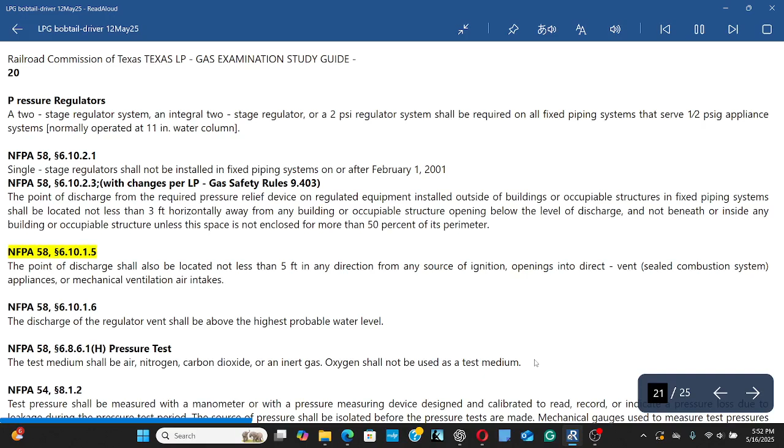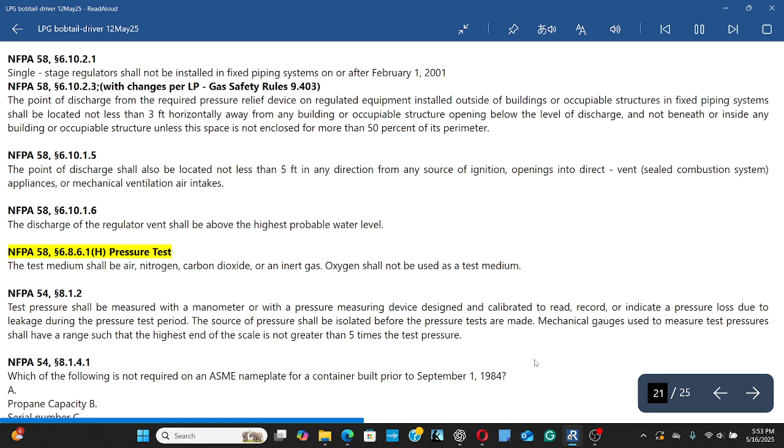6.10.1.5. The point of discharge shall also be located not less than 5 feet in any direction from any source of ignition, openings into direct-vent, sealed combustion system appliances, or mechanical ventilation air intakes. NFPA 58, 6.10.1.6. The discharge of the regulator vent shall be above the highest probable water level. NFPA 58, 6.8.6.1. H. Pressure test. The test medium shall be air, nitrogen, carbon dioxide, or an inert gas. Oxygen shall not be used as a test medium.

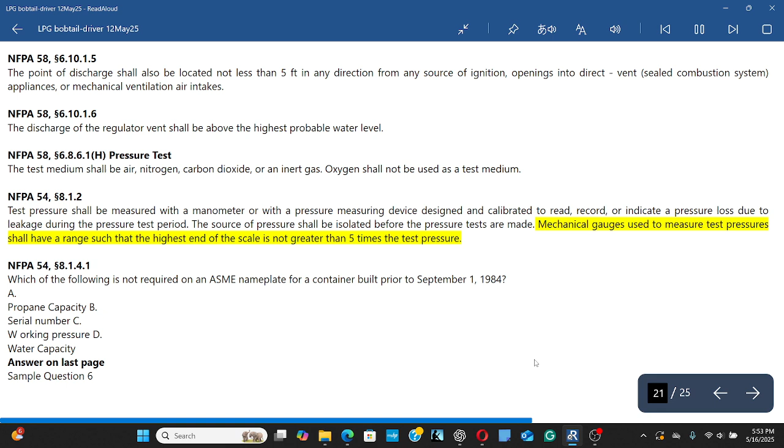NFPA 54, 8.1.2. Test pressure shall be measured with a manometer or with a pressure measuring device designed and calibrated to read, record, or indicate a pressure loss due to leakage during the pressure test period. The source of pressure shall be isolated before the pressure tests are made. Mechanical gauges used to measure test pressures shall have a range such that the highest end of the scale is not greater than 5 times the test pressure. NFPA 54,

8.1.4.1. Which of the following is not required on an ASME nameplate for a container built prior to September 1, 1984? A. Propane capacity. B. Serial number. C. Working pressure. D. Water capacity. Answer on last page. Sample question 6.

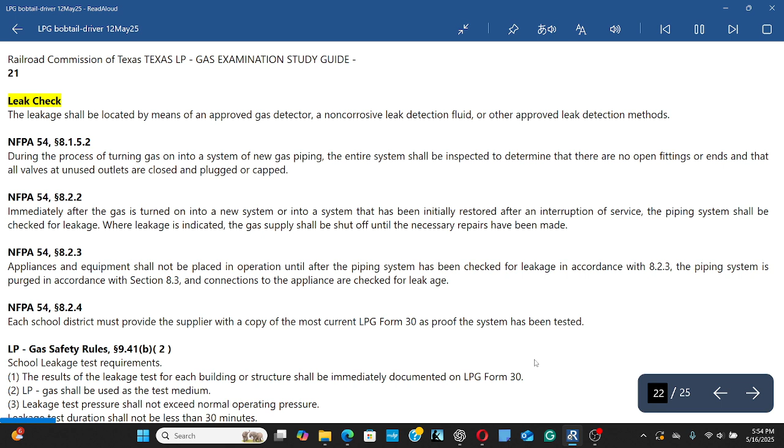Railroad Commission of Texas, Texas LP-Gas Examination Study Guide. 21. Leak check. The leakage shall be located by means of an approved gas detector, a non-corrosive leak detection fluid, or other approved leak detection methods. NFPA 54, 8.1.5.2. During the process of turning gas on into a system of new gas piping, the entire system shall be inspected to determine that there are no open fittings or ends and that all valves at unused outlets are closed and plugged or capped. NFPA 54, 8.2.2.

Immediately after the gas is turned on into a new system or into a system that has been initially restored after an interruption of service, the piping system shall be checked for leakage. Where leakage is indicated, the gas supply shall be shut off until the necessary repairs have been made. NFPA 54, 8.2.3. Appliances and equipment shall not be placed in operation until after the piping system has been checked for leakage in accordance with 8.2.3, the piping system is purged in accordance with Section 8.3, and connections to the appliance are checked for leakage.

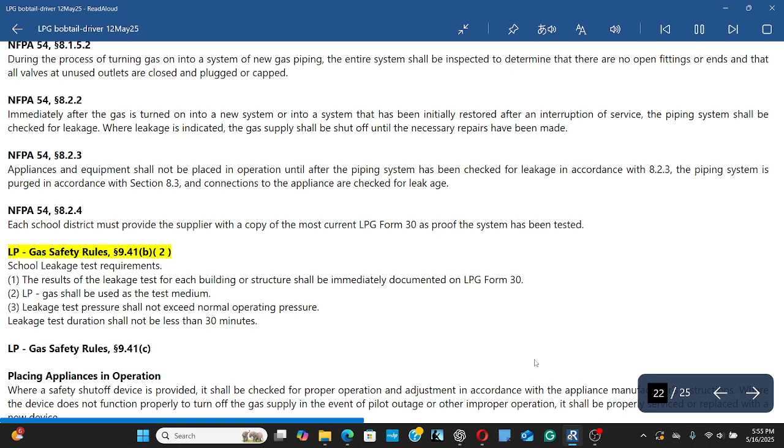NFPA 54, 8.2.4. Each school district must provide the supplier with a copy of the most current LPG Form 30 as proof the system has been tested. LP-Gas Safety Rules, 9.41, B, 2. School Leakage Test Requirements. 1. The results of the leakage test for each building or structure shall be immediately documented on LPG Form 30. 2. LP-gas shall be used as the test medium.

Leakage test pressure shall not exceed normal operating pressure. Leakage test duration shall not be less than 30 minutes. LP Gas Safety Rules, 9.41, C.

Placing appliances in operation. Where a safety shut-off device is provided, it shall be checked for proper operation and adjustment in accordance with the appliance manufacturer's instructions. Where the device does not function properly to turn off the gas supply in the event of pilot outage or other improper operation, it shall be properly serviced or replaced with a new device.

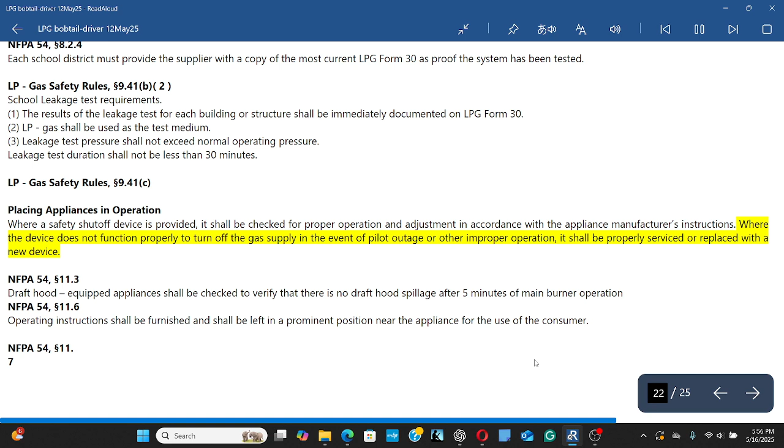NFPA 54, 11.3. Draft hood equipped appliances shall be checked to verify that there is no draft hood spillage after 5 minutes of main burner operation.

NFPA 54, 11.6. Operating instructions shall be furnished and shall be left in a prominent position near the appliance for the use of the consumer. NFPA 54, 11.7.

Railroad Commission of Texas, Texas LP Gas Examination Study Guide, 22. Cylinder, General Requirements. Cylinder inspection containers shall be designed, fabricated, tested, and marked or stamped in accordance with the regulations of the U.S. Department of Transportation, 49 CFR, Federal Aviation Administration FAA 14 CFR, the ASME Code Section 8, Rules for the Construction of Unfired Pressure Vessels. NFPA 58.

5.2.1.1. Containers that show excessive denting, bulging, gouging, or corrosion shall be removed from service. NFPA 58, 5.

5.2.1.4. A cylinder with an expired requalification date shall not be refilled until it is requalified by the methods prescribed in regulations. NFPA 58, 5.

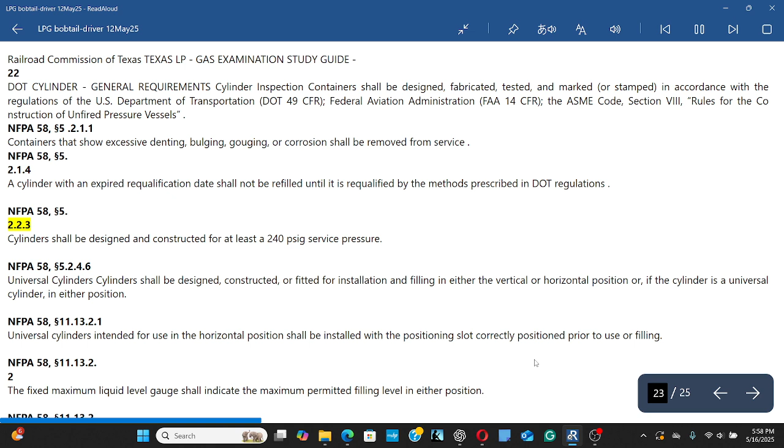5.2.2.3. Cylinders shall be designed and constructed for at least a 240 psig service pressure. NFPA 58.

5.2.4.6. Universal cylinders. Cylinders shall be designed, constructed, or fitted for installation and filling in either the vertical or horizontal position or, if the cylinder is a universal cylinder, in either position.

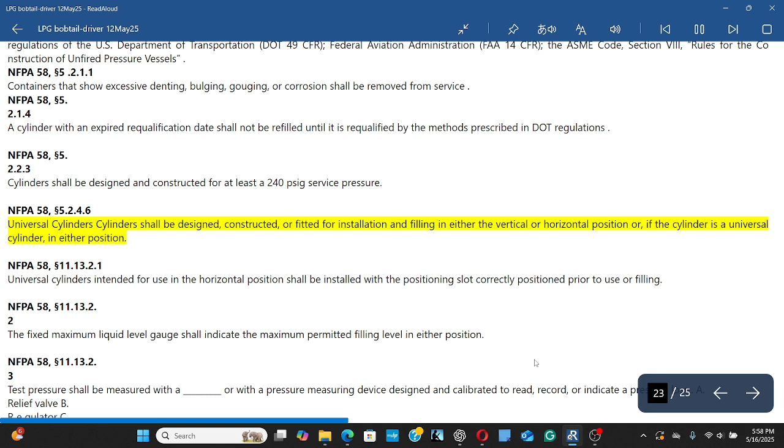NFPA 58, 11.13.2.1. Universal cylinders intended for use in the horizontal position shall be installed with the positioning slot correctly positioned prior to use or filling. NFPA 58.

11.13.2.2. The fixed maximum liquid level gauge shall indicate the maximum permitted filling level in either position. NFPA 58.

11.13.2.3. Test pressure shall be measured with a blank, or with a pressure measuring device designed and calibrated to read, record, or indicate a pressure loss. A. Relief valve. B. Regulator. C. Manometer. D. Fixed liquid level gauge. Answer on last page. Sample question 7.

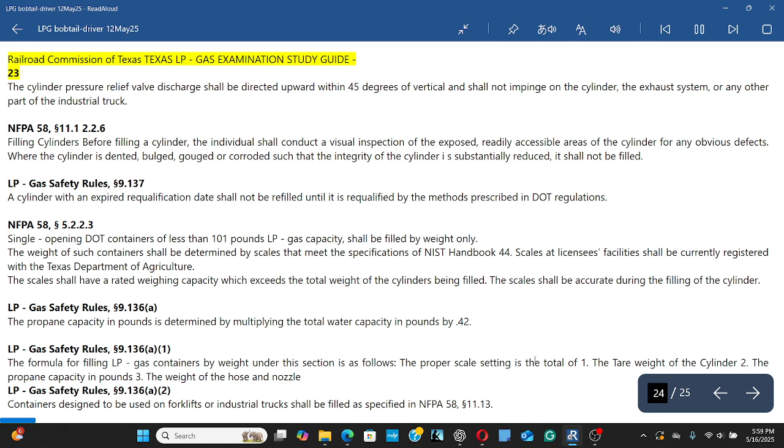Railroad Commission of Texas, Texas LP Gas Examination Study Guide, 23. The cylinder pressure relief valve discharge shall be directed upward within 45 degrees of vertical and shall not impinge on the cylinder, the exhaust system, or any other part of the industrial truck. NFPA 58.

11.12.2.6. Filling cylinders. Before filling a cylinder, the individual shall conduct a visual inspection of the exposed, readily accessible areas of the cylinder for any obvious defects. Where the cylinder is dented, bulged, gouged, or corroded such that the integrity of the cylinder is substantially reduced, it shall not be filled. LP Gas Safety Rules, 9.137.

A cylinder with an expired requalification date shall not be refilled until it is requalified by the methods prescribed in regulations. NFPA 58, 5.2.2.3.

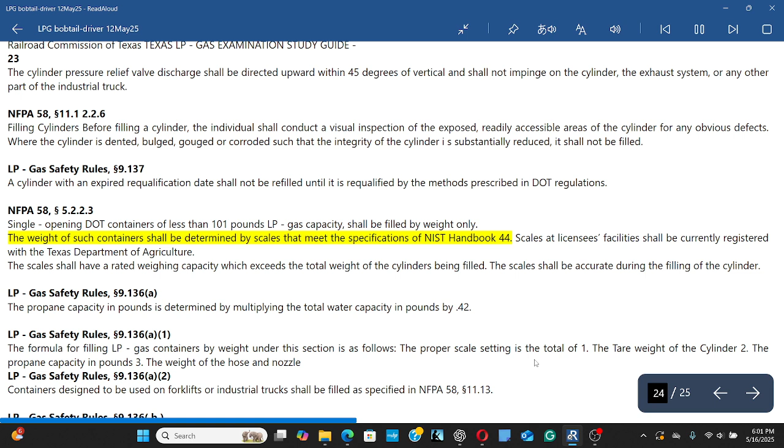Single opening containers of less than 101 pounds LP gas capacity shall be filled by weight only. The weight of such containers shall be determined by scales that meet the specifications of NIST Handbook 44. Scales at licensees' facilities shall be currently registered with the Texas Department of Agriculture. The scales shall have a rated weighing capacity which exceeds the total weight of the cylinders being filled. The scales shall be accurate during the filling of the cylinder. LP Gas Safety Rules, 9.136, A.

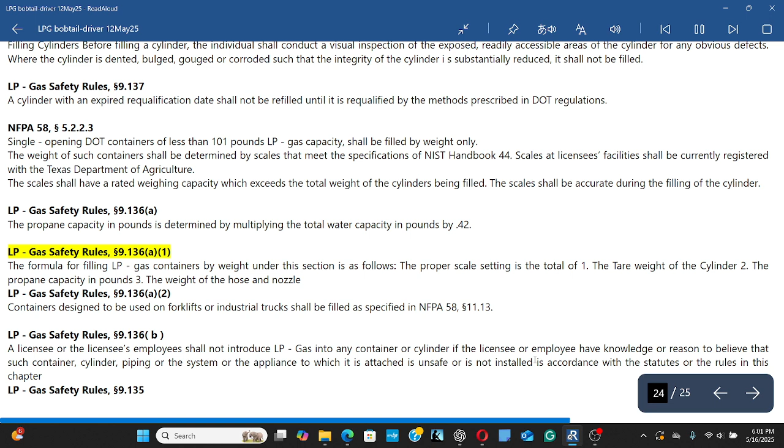The propane capacity in pounds is determined by multiplying the total water capacity in pounds by 0.42. LP Gas Safety Rules, 9.136, A, 1.

The formula for filling LP gas containers by weight under this section is as follows. The proper scale setting is the total of: 1, the tare weight of the cylinder; 2, the propane capacity in pounds; 3, the weight of the hose and nozzle. LP Gas Safety Rules,

9.136, A, 2. Containers designed to be used on forklifts or industrial trucks shall be filled as specified in NFPA 58, 11.13. LP Gas Safety Rules, 9.136, B.

A licensee or the licensee's employees shall not introduce LP gas into any container or cylinder if the licensee or employee have knowledge or reason to believe that such container, cylinder, piping, or the system or the appliance to which it is attached is unsafe or is not installed in accordance with the statutes or the rules in this chapter. LP Gas Safety Rules, 9.135.